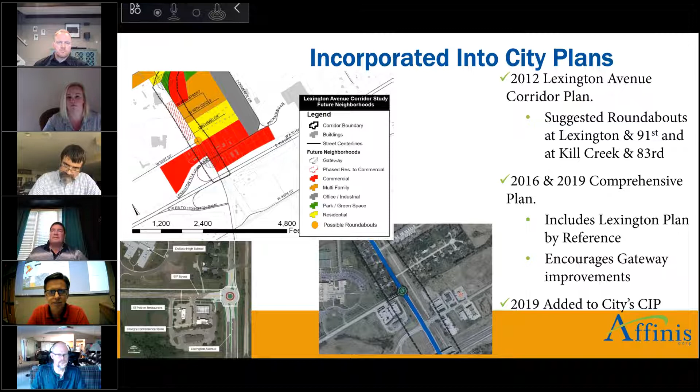I'm going to turn it over to Mike then to talk about some of the benefits of a roundabout and why this decision really was made and why we feel strongly that it's supported by the evidence. So Mike, go ahead and take it away. All right. Thank you, Mike. And just to make it easy on everyone, my name is also Mike, so we're both Mikes.

One of the things that you hear often is a signal is not warranted based on engineering criteria. You may have heard the MUTCD thrown around, the Manual on Uniform Traffic Control Devices. And these are things that are kind of frustrating to people because they're like, why does this manual tell us we don't need a signal? We drive this every day. We feel like we need a signal. So a couple things to note is even if a signal is warranted in these manuals, it does not mean that one needs to be installed. That just means that one can be installed. And I'll give you an example here later of a project that we worked on and why we ended up with roundabouts on that project.

One thing I want to point out on this slide is the importance of not installing a signal when it's not warranted, because they do more harm than good. Okay, they increase rear end accidents. So signals have an increase in rear end accidents. They also increase delay at intersections. Okay, and they also cost money to install and maintain.

And they increase the driver's risk of ignoring the signal. And basically, you can lose respect from the drivers at other signals. So you might have someone pull up on a regular basis, and they look around and they don't see anybody, and they go through a red light, well, then later on they might think that's a good idea at another intersection. So in general, really try and only install them when they're needed and they're warranted at locations.

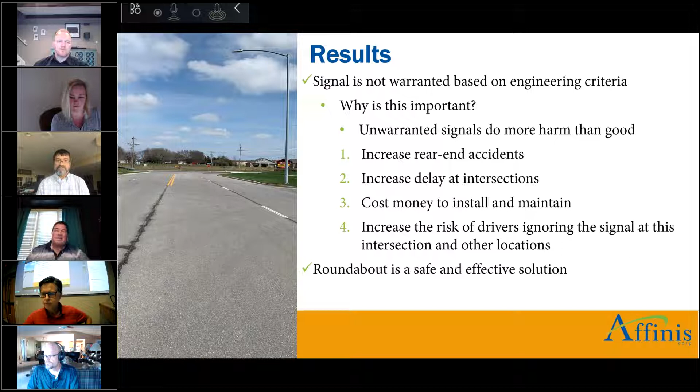So when you compare a roundabout and a signal, and I think we even saw a question related to the cost comparison, a signal by itself, just the signal hardware, is anywhere in the neighborhood of $250,000 to $300,000. But that's not the whole picture, because at an intersection, the pavement doesn't last forever. So at some point, you will replace the pavement in an intersection.

So if you're replacing the pavement in an intersection, whether you come back with a standard intersection that adds turn lanes and becomes wider on the streets with the left turn lanes and that sort of thing, or you come in and add a roundabout, which doesn't necessarily add a left turn lane, but adds some width for the circular radius, you're basically at a wash between the cost for the two different options.

The biggest difference is the ongoing maintenance. Pavement maintenance continues to be pavement maintenance, just like it would be if you had a standard intersection. Whereas with the signal, you now have electricity costs. You have to have a skill set to be able to maintain and operate the signals, replace equipment as needed, and that sort of thing. So definitely lower cost in the long run. Up front, it's pretty much a wash.

The one thing about roundabouts too is they do have battery backups on signals now and that sort of thing. But in general, when you have big storms and things like that, you can get lightning strikes and power outages at your signals. Whereas a roundabout, being just pavement, you don't really have that issue to worry about.

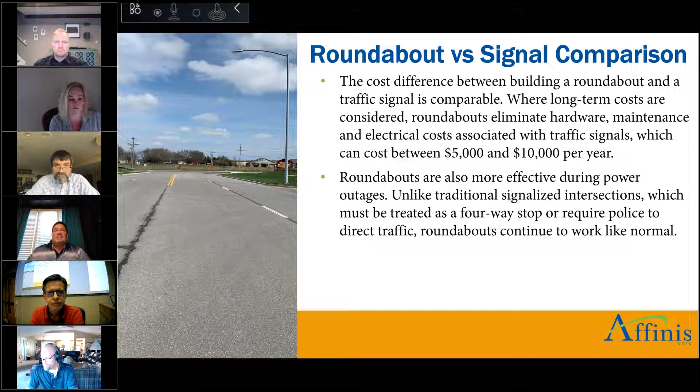So this video I'm about to show you doesn't have any sound, but this is the video from the most recent study, and they did some simulation. You'll see pretty soon it'll zoom down in, but here's the high school, here's the development with the Casey's, here's 91st Street, here's Lexington. And as you get down in here, this gives you a visual idea of traffic moving through the roundabout. Again, this is representative of the traffic volumes in 2040. So just run this for a quick second here. All right, so that just gives you kind of an idea there.

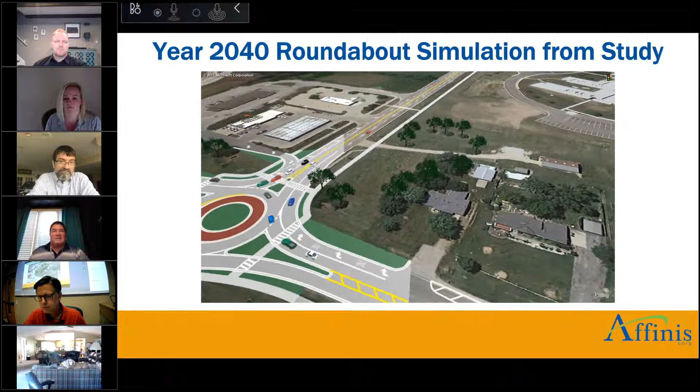As Mike mentioned, we had done a concept plan as part of our proposal to the city. It is very similar to the ones that are in the study as well, and there's nothing earth-shattering about it. We did try and make some minor improvements and changes from our perspective. You'll see that the entrance still exists coming out of the development, but it's got a nice radius on it to help merge with traffic.

You'll notice that the crosswalks, hold on, I'm sorry, I am pointing on the wrong frame there. You'll notice that the crosswalks are kind of angled, and that's so you have the shortest distance across the pavement to the median area, and then the shortest distance across the pavement from the median. What this does for pedestrians is when you're crossing here, you only have to look one way. Then when you get to the median, you have a refuge, and you only have to look one way to cross. So it is a fairly safe movement from a pedestrian standpoint.

Mike, could I just add something a little bit on the pedestrian side? If you look closely, I don't know if folks can see it, but we have an existing crosswalk just to the north of 91st that crosses Lexington, and you can kind of see the stripe bars under your rendering there. That's a very difficult intersection for pedestrians to cross right now, really at any time. It's very wide, so it takes you a long time to cross all four of those lanes and the median area. Yeah, you're pointing it out there.

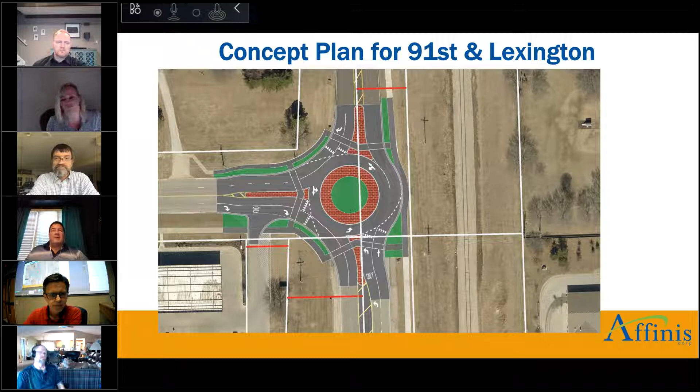One of the things that's very important from a roundabout perspective is conflict points. Essentially, when you have a standard intersection, whether it be stop signs or signal, you have 32 different locations and opportunities for vehicle-to-vehicle accidents, and you have another 24 for pedestrians. Whereas at a standard four-legged intersection with a roundabout, you have 8 vehicle conflict points and 8 pedestrian conflict points. So you can see there's a significantly smaller number.

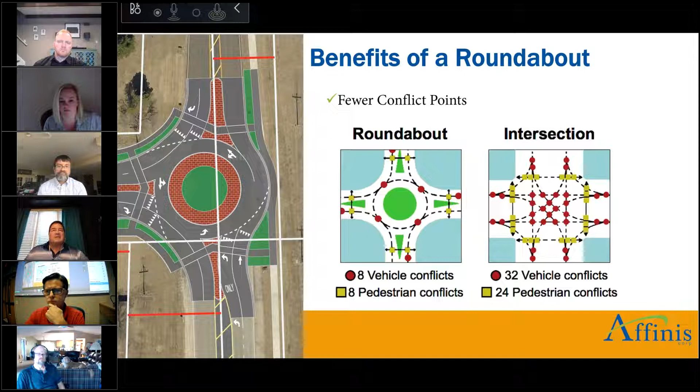And the biggest reason, let me pull that highlighter back up here. The biggest reason is when you have people coming into the circular roundabout and someone coming around the roundabout, most of your accidents are going to be sideswipes. So even when you do have an accident, they're very minor in nature, and usually just property damage only. So it's very beneficial from that standpoint. You don't have the T-bones, or most of the time you don't have the heavy stop rear-end accidents that you have at signals. So there's a big benefit from a safety standpoint.

There was concern when roundabouts first came out about pedestrians and how you're going to get across. And they've noticed a 40% reduction in pedestrian accidents for the reasons I mentioned earlier, which is as you're crossing the first part, you're looking one way. And then when you get to the refuge island, you're now looking the other way only as you're crossing over. So you're not trying to navigate that entire distance and looking both ways at the same time.

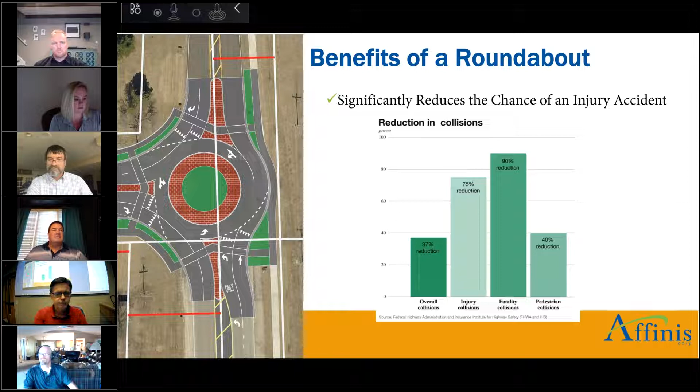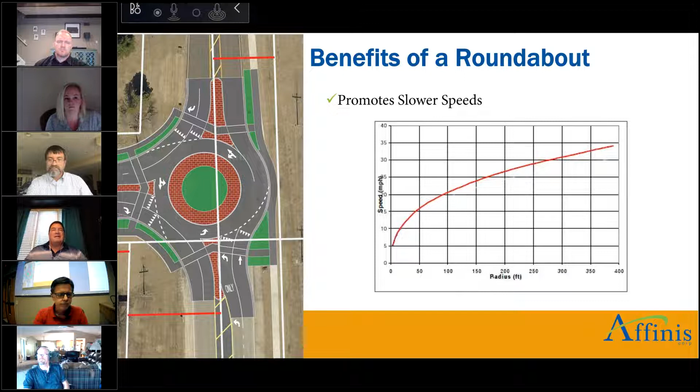And one of the benefits, I alluded to this earlier: if you're sitting at a traffic light and there's no one around, there's nothing more frustrating than that. The neat thing with roundabouts is if there's not another car coming from the other direction, you're free to keep moving. And if there is a car, you're waiting just long enough for that car to pass, and then you get to keep going. Whereas with the signal, sometimes even after a car passes, you're still sitting for a minute or a minute and a half, just waiting for the signal to change.

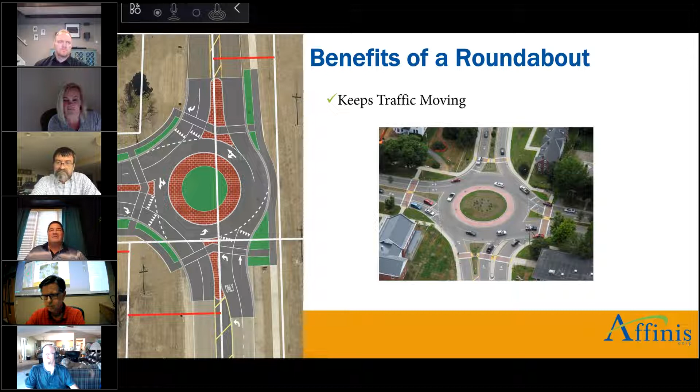And I want to remind you, I believe I mentioned this at the very beginning too. I'm not for signals or against them. I'm not for roundabouts or against them. They both have their values and they both have their places. It's all about improving safety and moving traffic.

One thing that was brought up for concerns, and is usually a concern at roundabouts, is people want to know: can you get big trucks through there? Can you get emergency vehicles through there? Can you get buses through there? And the answer is yes, and on all occasions.

We wanted to point out too that the Northwest Consolidated Fire District's fire chief, your fire chief, supports having a roundabout at this intersection. And I'm going to play this video, and what I have to do is turn my microphone off to turn the sound on for you to listen to it. And so I'm going to do that first. The purpose of this video is basically to show you how they're moving large vehicles through a roundabout, and this is from a Pennsylvania location. Give me just a second here.

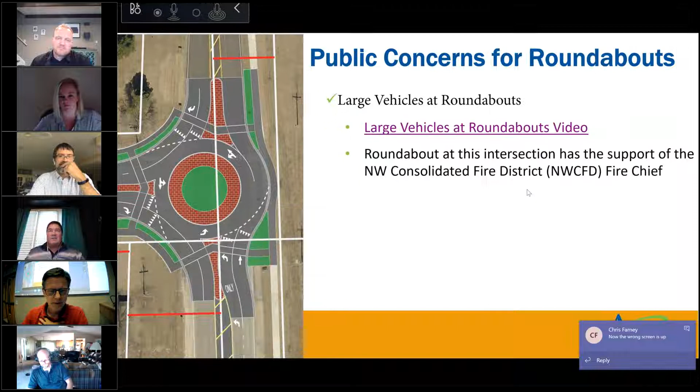Yeah, Mike, I don't think we could see that video. I didn't see it on my screen. Darn it. Yeah, I think your display screens were switched or something. All right. Well, my media skills are not very high. Sorry about that. Were you able to hear it? Yeah, we could hear it. I could. We saw the beginning of it. We just couldn't see all of it. Yeah, the beginning was fine, and then something switched. Maybe we could go back to it during the Q&A session. We can definitely do that. Or now. Well, we'll wait. Okay.

All right, there we go. So again, somebody had asked about 159th Street. This is a project that we had worked on with the city of Overland Park and Blue Valley School District, and Blue Valley High School in particular. Basically the school is the oldest school in the district. It's close to the road. There's not a lot of stacking distance to get into the parking lots and what have you. It was a 2-lane unimproved road, and they wanted to improve it. And one of the improvements that they wanted was signals at both of the access points to the school, one on the east end and one on the west end.

The city said no. The volumes during school actually were enough to warrant a signal, but the city had a policy that they will not signalize an intersection for what they essentially call 15 to 30 minutes a day, 9 months out of the year. So they said no. So then it's like, okay, what are some other options? And so that's where we ended up looking at the roundabouts and landed on that the roundabouts could handle the traffic at these locations. These are 2-lane roundabouts on the 4-lane divided roadway on 159th Street, so a very busy road. And you've got the 2 entrances to the school that load and unload every day during school.

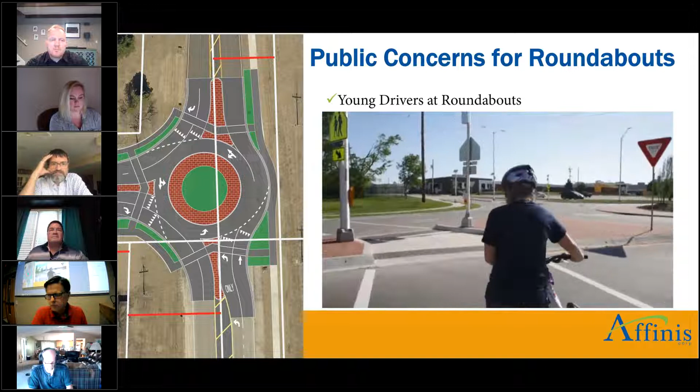Just have a much more consistent, careful traffic flow. You've got 4 lanes, so people needing to get through can get through. Those needing to wait and drop off can do that too. And so it's just much more accommodating than it used to be, and safer for everybody, whether it's pedestrian or driver.

All right. Hopefully everyone was able to see that one.

This is moving on to some example projects, and I do want to go back again on the 159th at Blue Valley. My kids did go to high school here as well, and one of them was driving back and forth, and it was taking in the neighborhood of 25 minutes in the morning to go to school from our house, and that dropped to roughly 15 minutes total from our house to parking in the parking lot. So pretty good savings of time just from the improvement of flow for cars getting to and from the school.

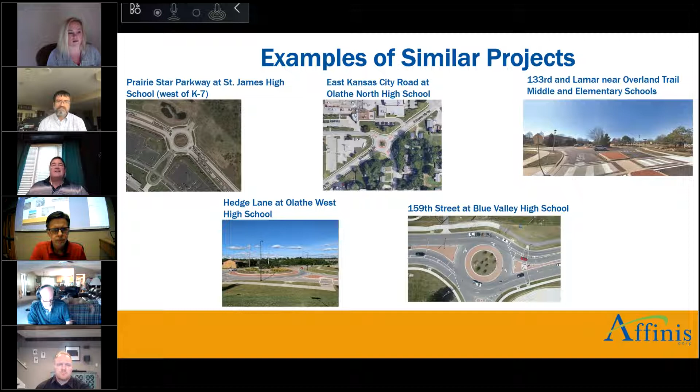That's the gist of what we had to show you, and we'll definitely move into questions and look forward to answering your questions and hopefully give everyone a good feeling about having a roundabout at this location.

Well, thanks, Chris. I don't know if we're going to get everyone, but appreciate that. Whitney, we posted the meeting notice online on social media platforms, and we had several questions generated from that. Do you want to give us those? I see we also have another one here on the chat. So give us the online ones first, and then we'll just step through any others that show up here in the chat.

One of the biggest ones was, we have the extension with 91st Street to Sunflower, and then the school district is putting in another access point to the high school. Why do we even need this roundabout? And shouldn't we just wait to see if that helps the current situation? That was a big question. Yeah, so what's the need?

The hope is really that the 91st Street extension especially would alleviate some of that pressure on this intersection for that school time. We just finished that. We had about a semester of experience there with the intersection. Didn't seem like that alone did much to the traffic volumes. Of course, we haven't done any traffic counts since that road opened, but just in practical experience, it didn't seem like that did really enough to solve the issue. Similarly, the 87th Street connection, it's hard to tell. I'm sure it will take some pressure off the intersection, but not all of it.

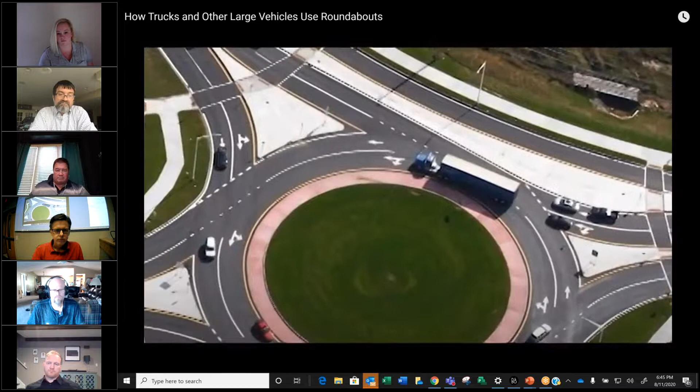Truck aprons can be designed with smooth curves, as shown in this Nebraska example. This allows the rear tires of the truck to comfortably mount the truck apron without risking rollover. School buses rarely need to use the truck apron. This Wisconsin roundabout is large enough to accommodate school buses wholly within the circulatory roadway. Trucks can be permitted to use multiple lanes in multi-lane roundabouts depending on the area and level of truck activity. In Wisconsin,